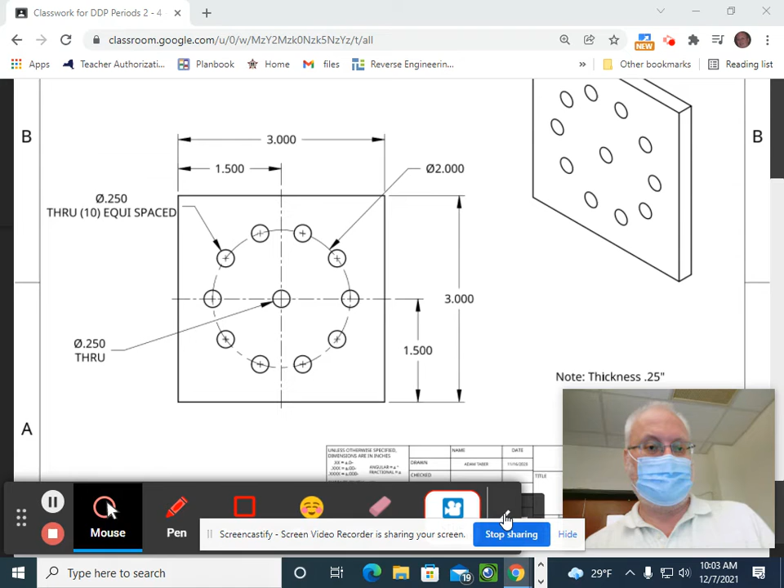So this is the circular pattern right here. This is actually called a bolt hole circle. Bolt hole circles are when you have holes in a pattern like this. So please make sure you're paying attention, turn your monitors off, and this will be available for you. This will take me 10 minutes or less maybe.

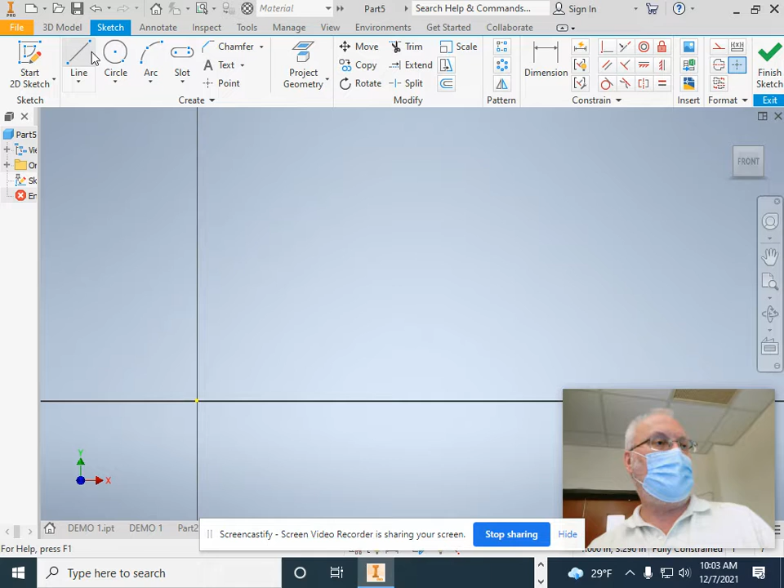All right, so I'm going to go back to Inventor here and start my 2D sketch just like we always do. The first thing I'm going to do is draw a rectangle, and I'll pull this out and dimension it. I think if I remember right, the dimensions are 3 by 3, okay?

Let's see, am I right? Yep, 3 by 3. All right, now the next thing is I'm going to draw 2 circles. So I have a 0.25 diameter through, and then over here, 1 inch from the center circle is going to be another circle that is 0.25 inches. So I'm going to go back to Inventor here and start the Circle Tool.

The little dash lines that appear when you're moving your cursor around are called inference lines. So I'm going to put in my diameter, 0.25. That puts it right in the center, but I need to dimension it also, so I'm going to click on dimension.

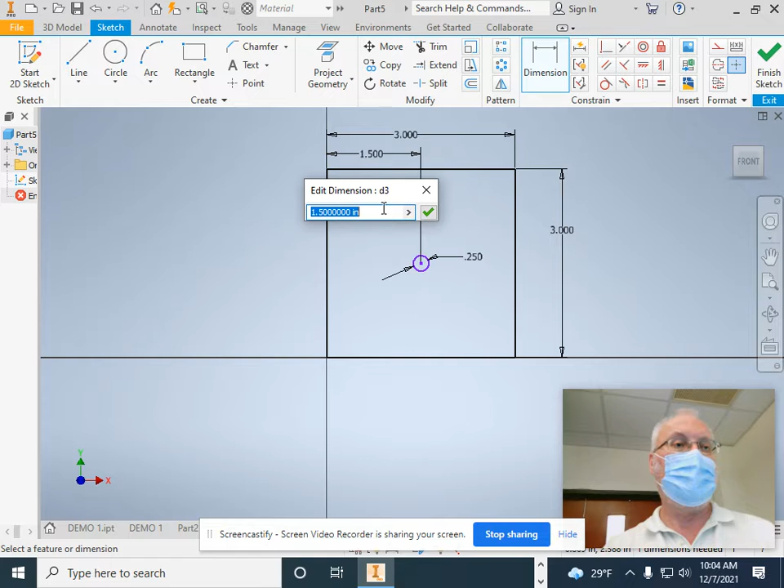I'll click on the edge of the circle, the edge of the line over here, and it's 1.5. And then the edge of the circle here, and down the bottom, and I'll hit 1.5 again. So that means that circle is fully constrained, because it's got 2 dimensions on it and the diameter dimension.

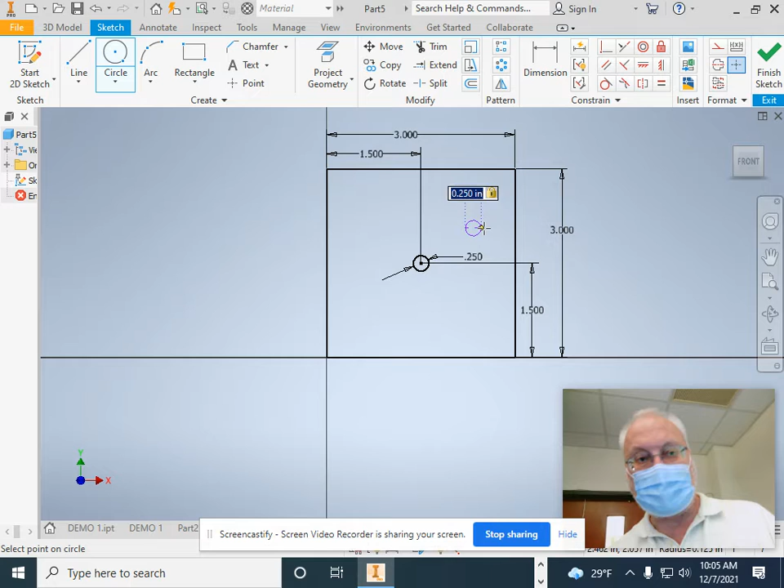Next thing is I'm going to create another circle. I'm just going to put this one up here in space. I'm going to make this 0.25. Now I'm going to use one of my constraints here to put that circle in line with this guy down here. So the constraint I'm going to use is horizontal.

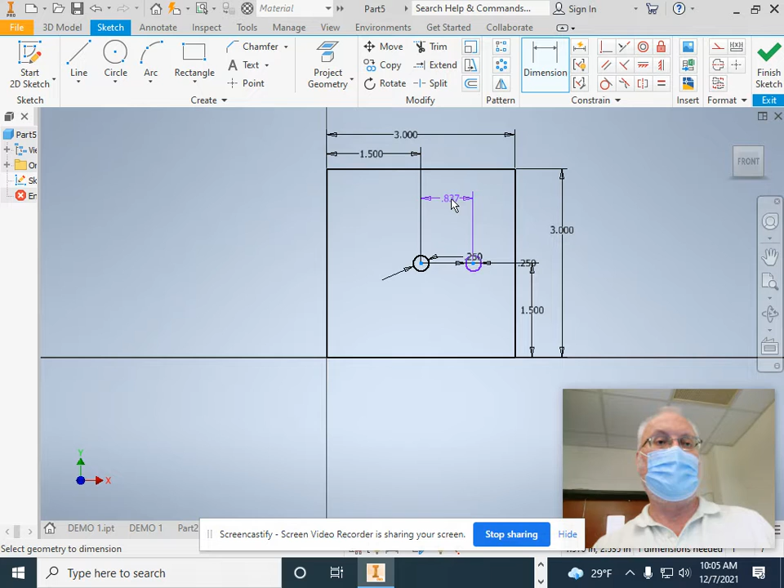So if I click on the center of the circle that I want to move and the center of the other one, that puts it in the middle. Dimension: I'm going to dimension from the center of the center circle, middle circle, to that one, and this is a dimension of 1.

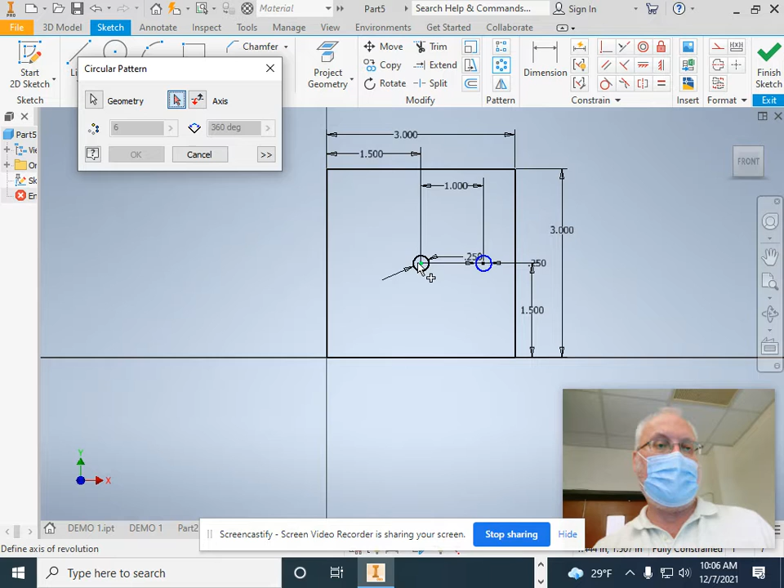Next thing is the circular pattern. The circular pattern's right here, and the geometry that I want to pattern is that circle out there. Nothing else wants to be patterned, so now I'm going to click on the axes, and the axis is the center of the middle circle. There's 10 of these, and I'll say okay.

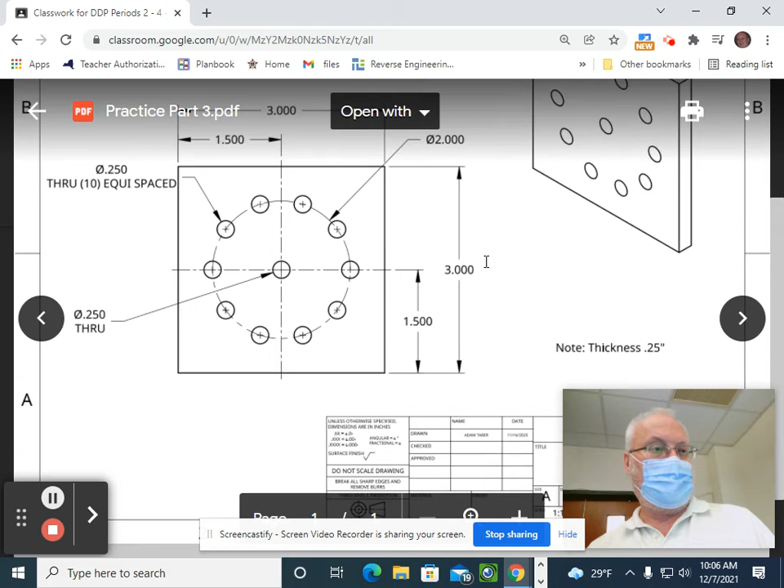So the good news is that creates that circular pattern for us, and it's easy to do when you know the tricks, I guess is the best way to put it. Now, let's see, is there anything else I need to do to this guy? Nope, nothing else. All right, so the thickness is 0.25 inches.

So I'm going to finish that. I'll extrude it. I'm going to select that surface right there, and my distance is going to be 0.25. And I'll say okay. No, the other one is. Okay.

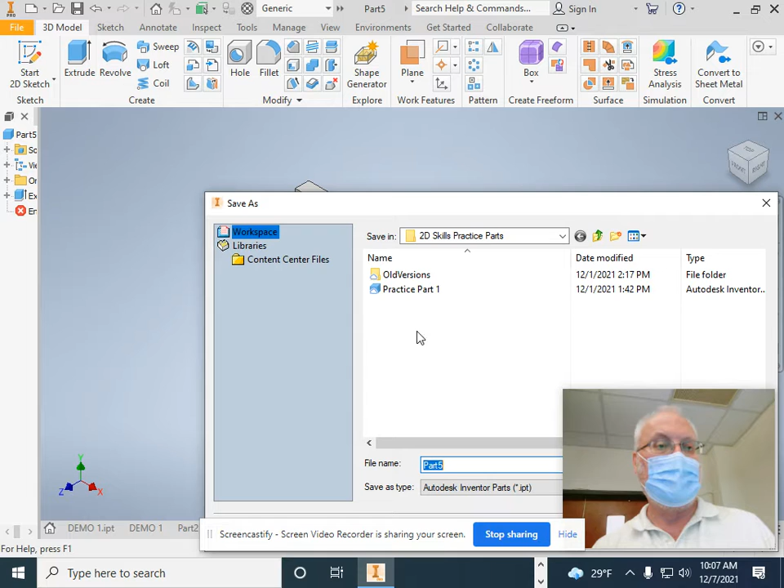So this is my part, and the first thing I want to do is save it. So I'm going to hit save, and I'm going to call this... whoops, I actually want to put it on my desktop, so I'm just going to put it on my desktop. You guys don't want to put it on your desktop, but I'm going to put mine there. And I'm going to call this P4, for period 4, and I'll hit save. Okay?

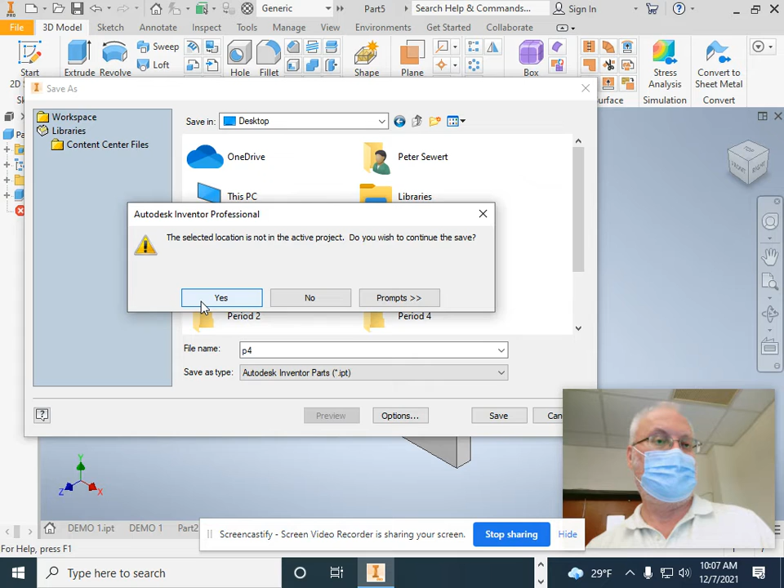Easy, guys, because what could happen is I could decide not to post this and not help you. Yeah, all right.

So I've got my part saved. The next thing I need to do is make my drawing. Your drawing needs to match this. Now, what you won't be able to do is use this title block here, this area in the bottom right-hand corner. That's okay.

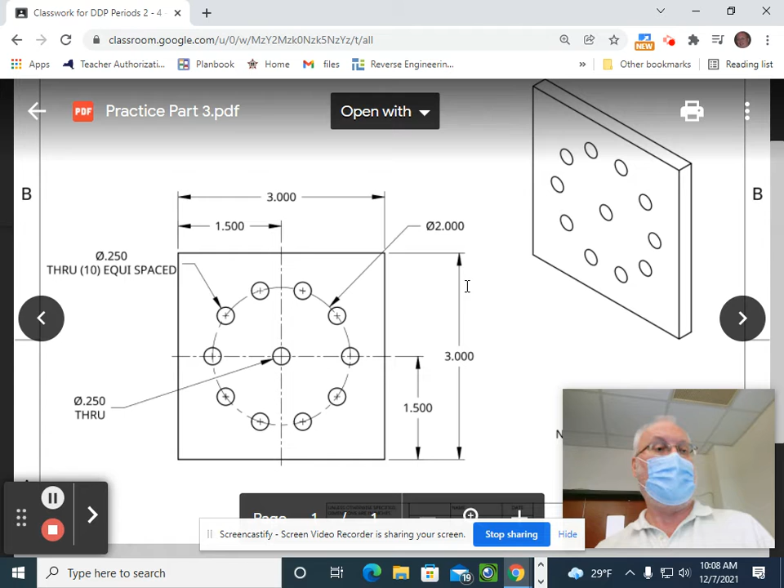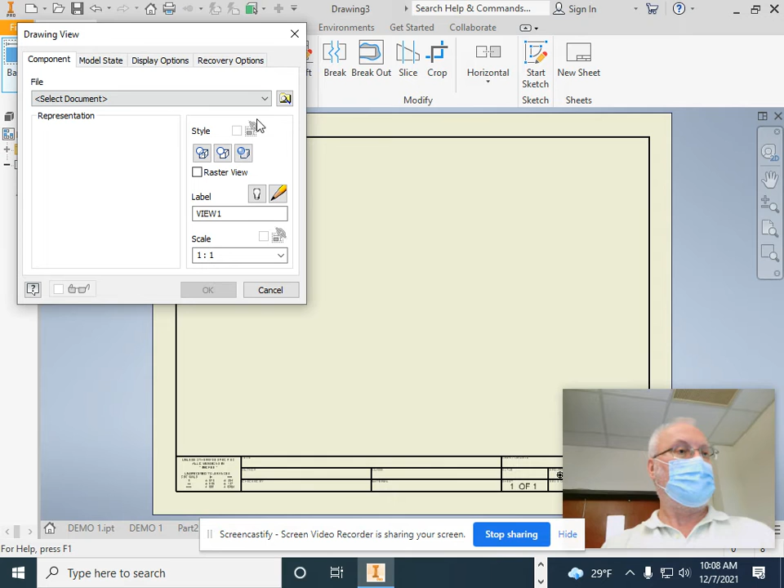Ordinarily, you would put all this stuff in, but I'm just going to skip that step right now, in the interest of time. Now, base is going to be the part that I just chose.

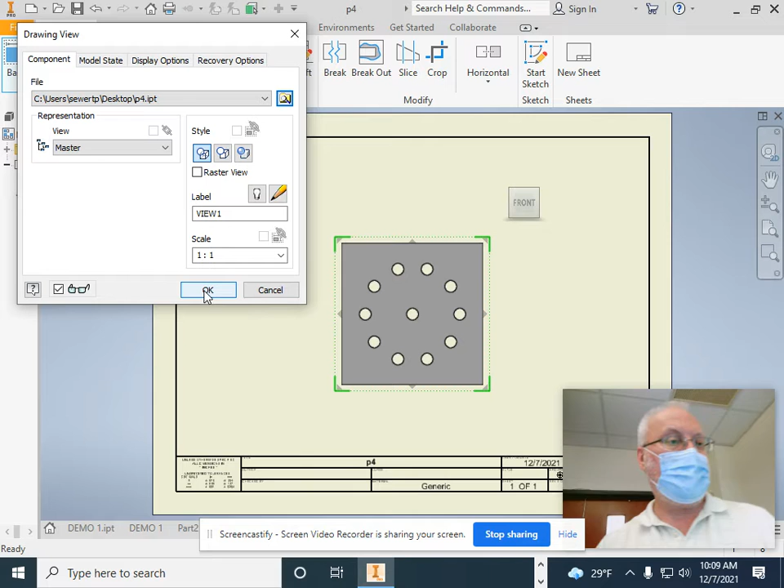So I'll go to my desktop, find P4, and say Open. I'll say yes to that, and that puts it in. And I'll go up here to the upper right-hand corner, click, and just say OK right now.

Now I'm going to move this over, and bring this one down. Let's take a look at our dimensions here.

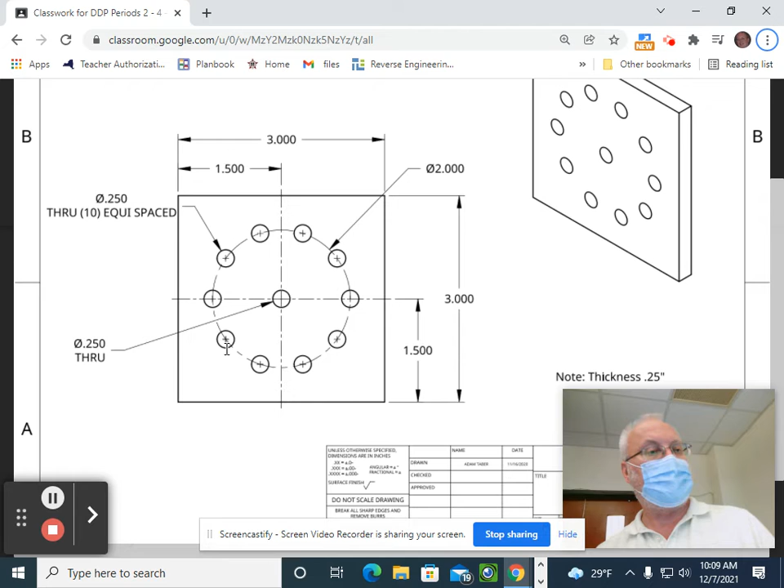Okay, so this is where the help is really going to come in. When you look at this, you'll see crosses going through the centers of these circles, and there's this line right here. What I want to do is put that line from circle to circle to circle to circle to circle. So I'll go to Annotate and go to the Center Mark tools.

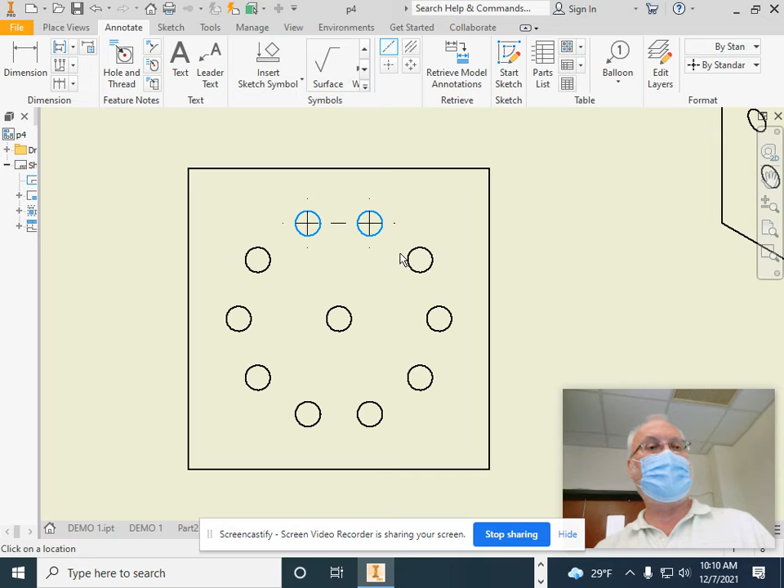I'm just going to click on Center Line, which is just a straight line. Now I'll click on the edge of this circle, the edge of the second one, the edge of the third one, and now you'll see this is creating... whoops, well I guess I goofed it up. That's not good, I'll undo this. I'll undo again. Okay, let's try it again.

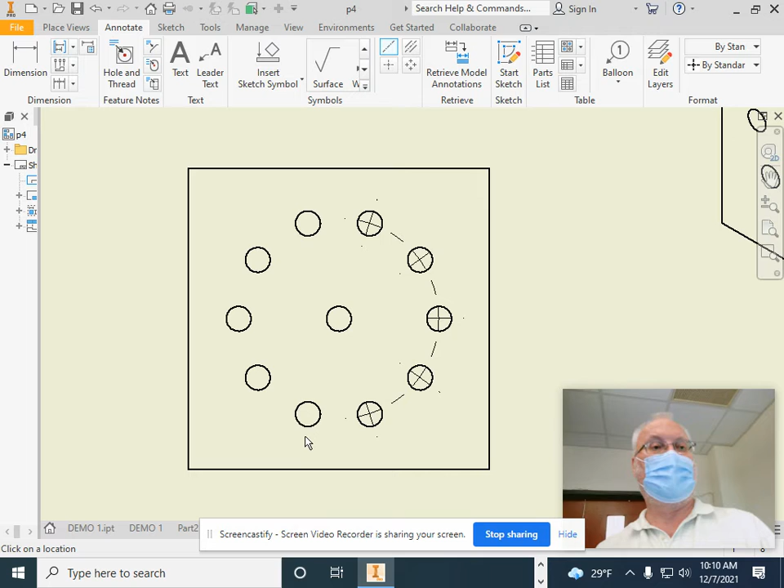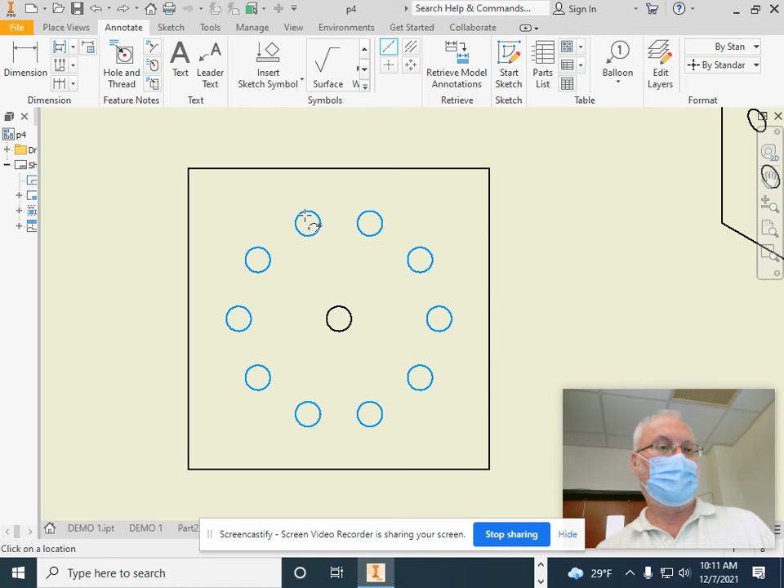Centered pattern, okay, and I'm going to select each one of these all the way around. Oops, well let's see, try it again, restart again. 1, 2, 3, 4, 5. You have to keep clicking on the edge of the circles. Yeah, that's what I think I was having trouble with.

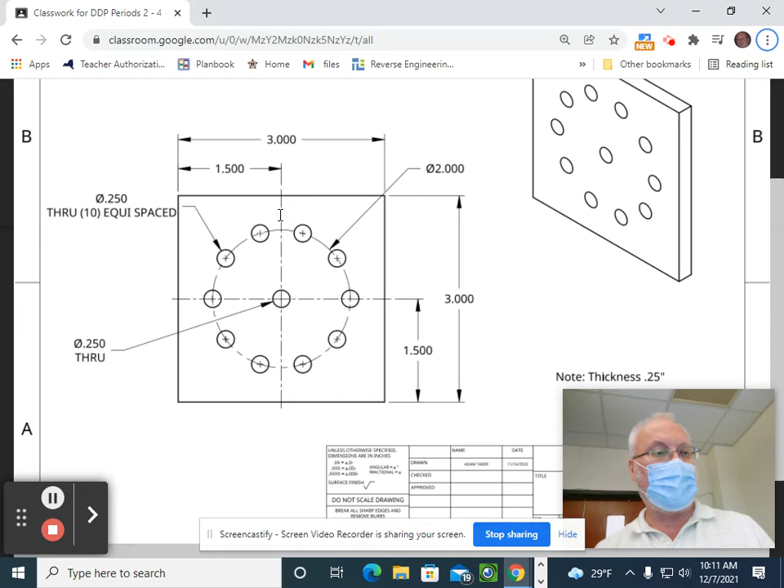Now, once you've got this all done all the way around, you're going to right click and say Create. Now, the center circle also needs to have a cross in it, but one thing I'll tell you right now is see how these lines go here, they go across. I can't figure out yet how to do those, so what we're going to do is just not worry about it and put that center circle in the middle.

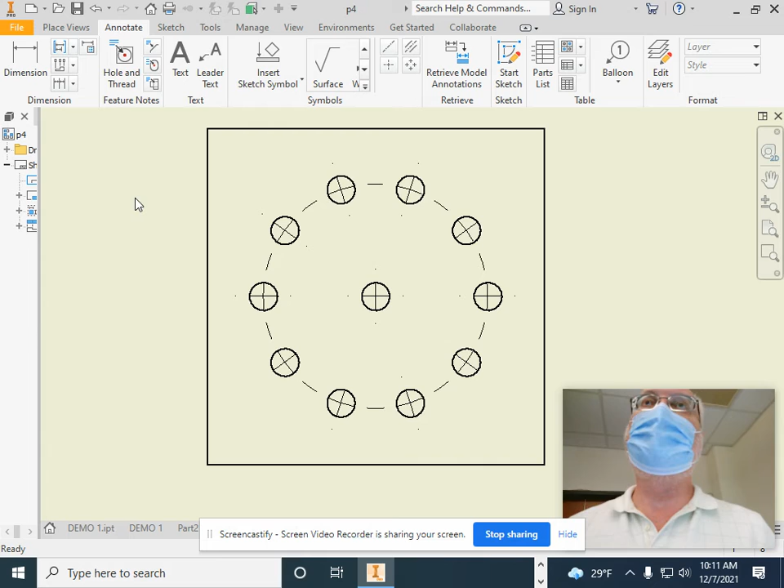The other dimensions here, okay, and you should pay attention to the video about how to do some of this dimensioning. If I go to Annotate and come up here to the left, just to the right of the word dimension, there's baseline and baseline set. If I click on baseline set, it wants me to select a model or sketch geometry.

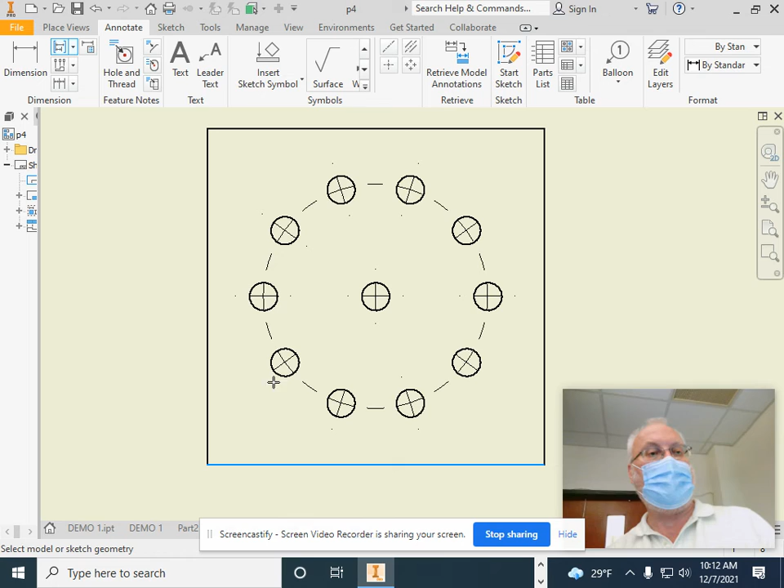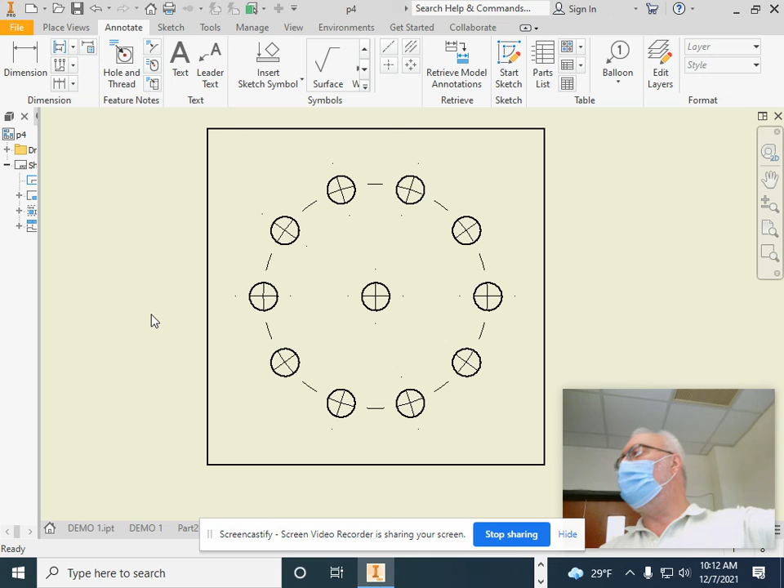So I'm going to click on that first line, then click on the center mark, and then click on the top line. I'll right click and say continue. When I do that, I get my dimensions baseline done very nicely rather than me having to do all the dimensioning myself. So once you have that there, you just right click and say continue.

The other one is the note that's on here. This note right here says diameter 0.250 through 10 equally spaced.

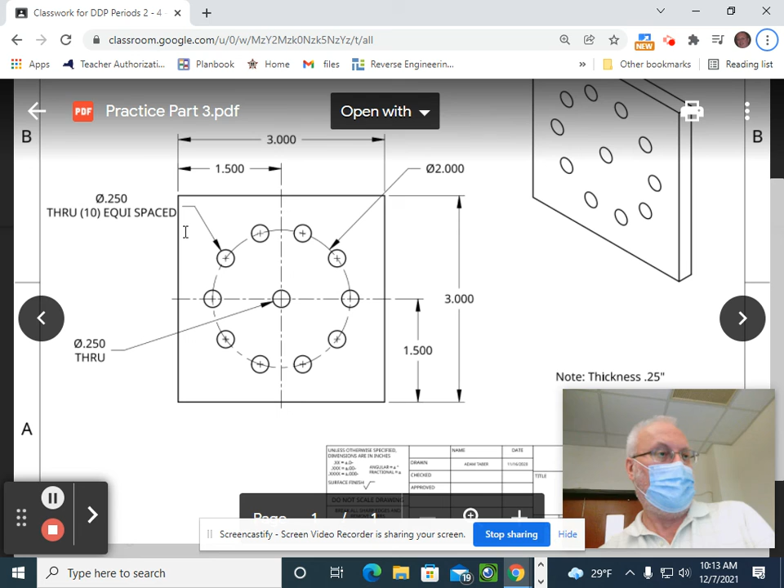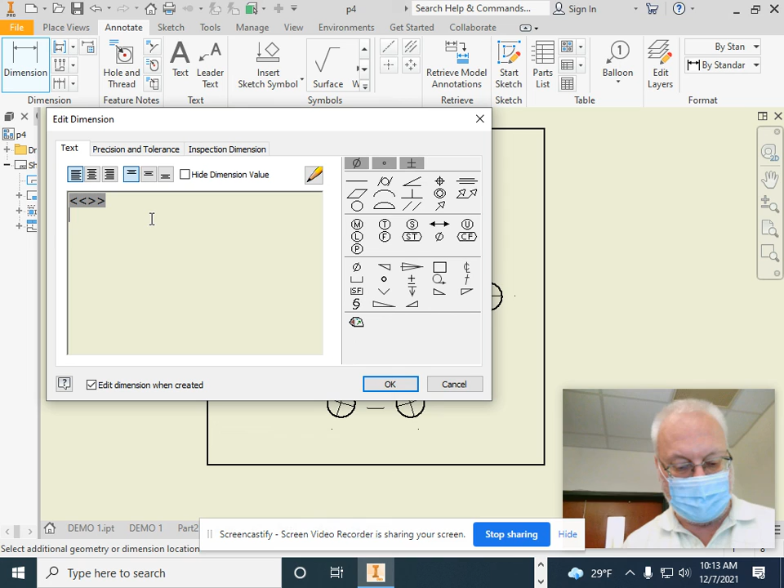So if I go Alt-Tab here, let's try this. I'm going to go to Dimension, click on that, and bring that up. Then I'm going to hit Enter and put in the note, which is 'through 10 equispaced.' This is going to be in caps lock. Okay, and I hit OK, and that creates the note.